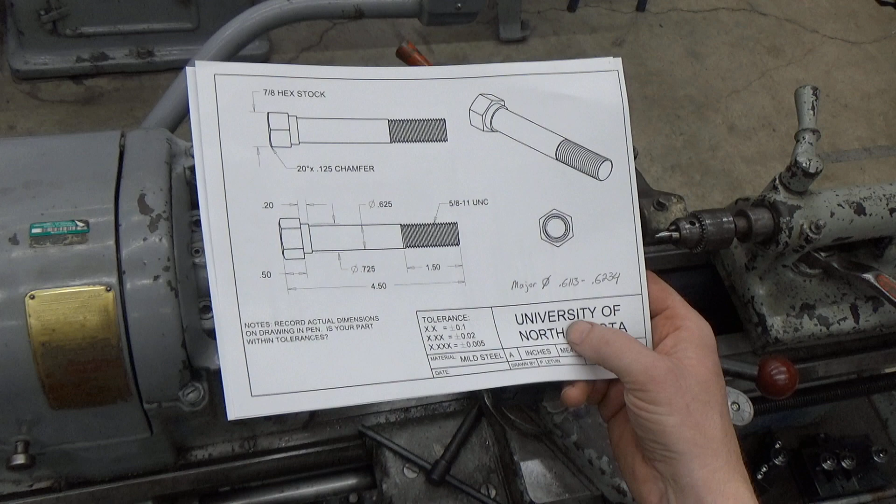All right, in this video we're going to be talking about the manufacture of this bolt that we use for our 418 lab. You guys can see we start off with a chunk of 7/8 inch hex stock.

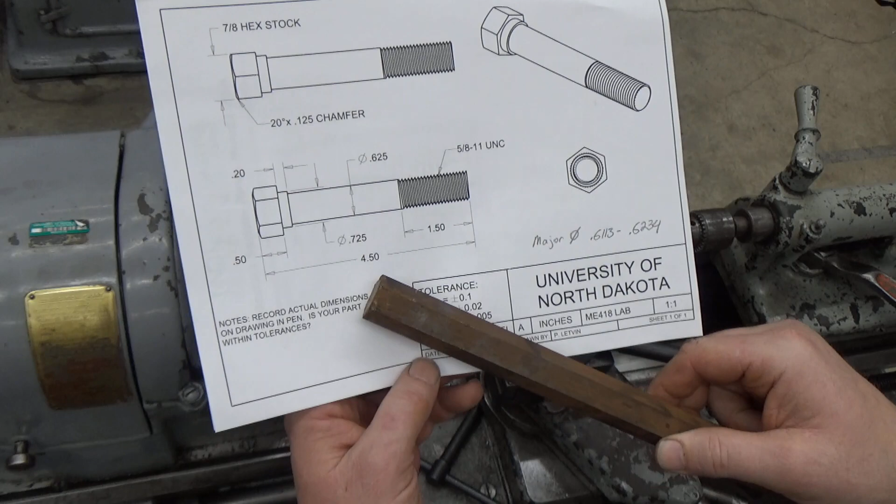Now it'd be a wrong decision to cut that directly to 4.5 inches, which is the finished length of the bolt, because we've got to have something to chuck it up and work with. So I recommend that we cut it at least 5.5 inches, if not much longer, so we can always bury some of the stock inside the chuck. So 24 inches would be fine, and 5.5 inches would be fine, so there's something to hang on to.

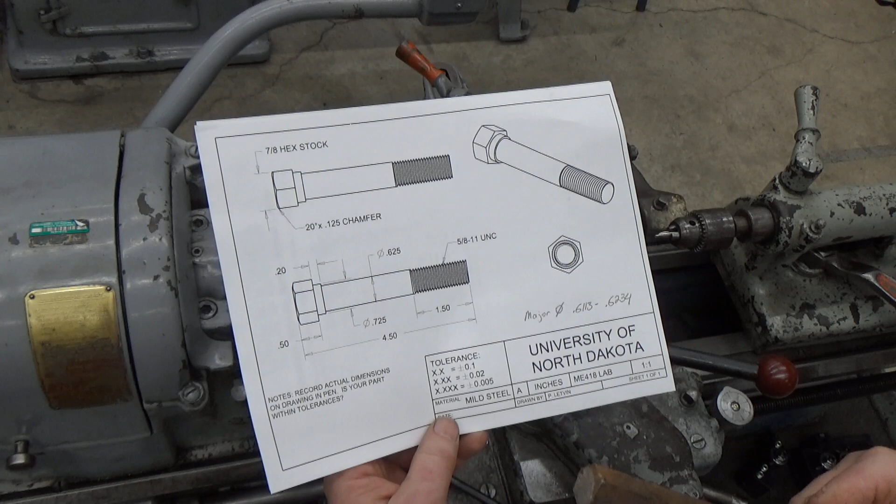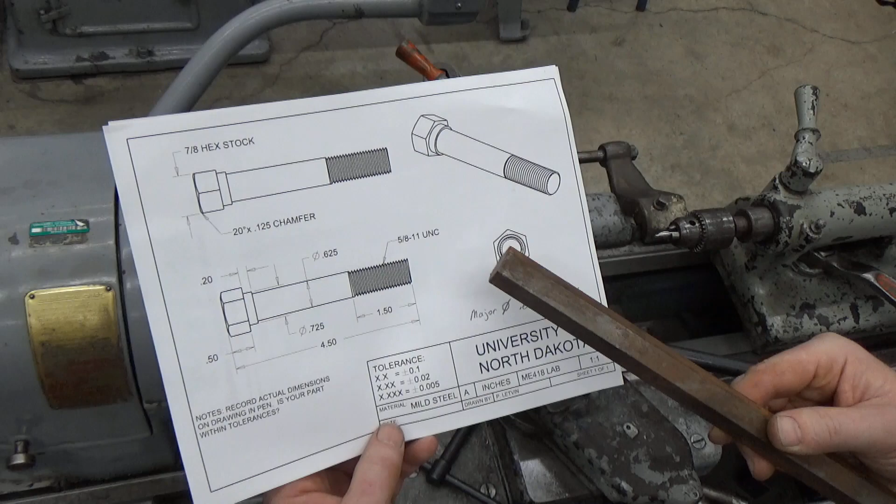And you can see the different operations. I'm going to take and work on getting it down to a 725 diameter first, and then afterwards we'll work on getting it to that 5/8 inch for the thread size there. So the only thing that's missing on here is we do need, because this is going to be sticking out of the chuck a good distance, we do need to put a center drill and turn it between centers.

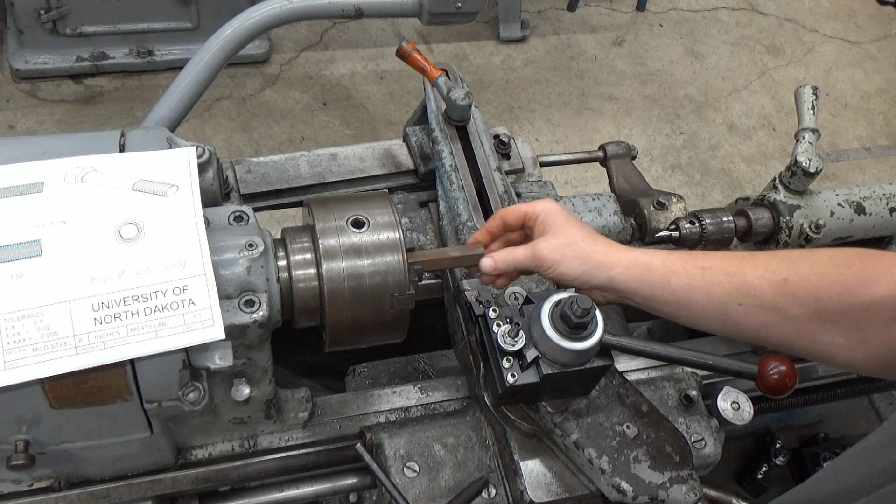So let's get it started here, and the first thing we're going to do is chuck up our material inside of our chuck. I'm going to hold it in there real close to the center so I get a nice face cutting operation done on this.

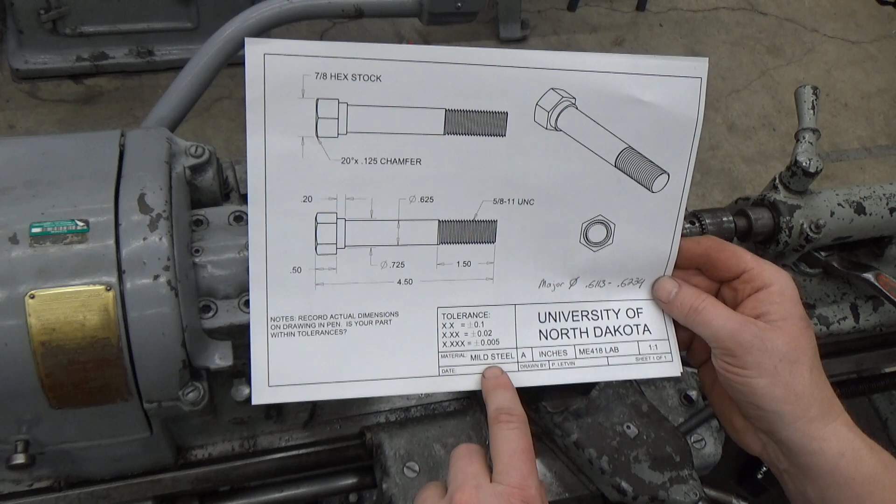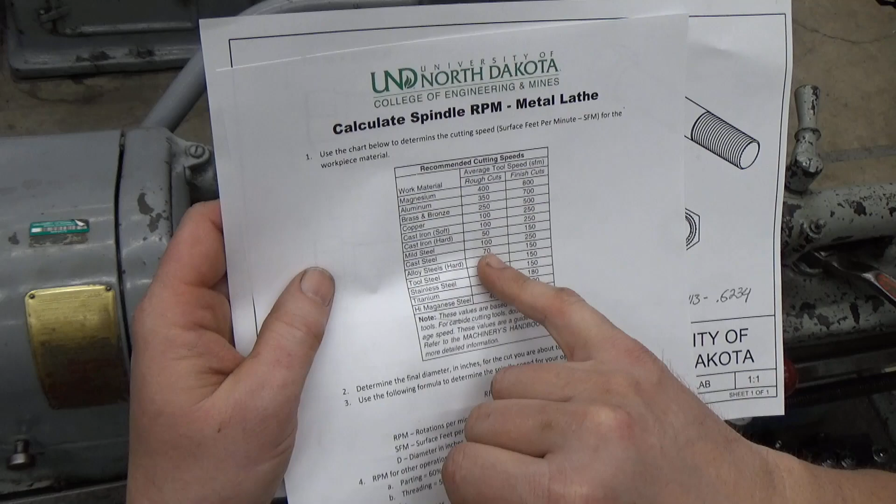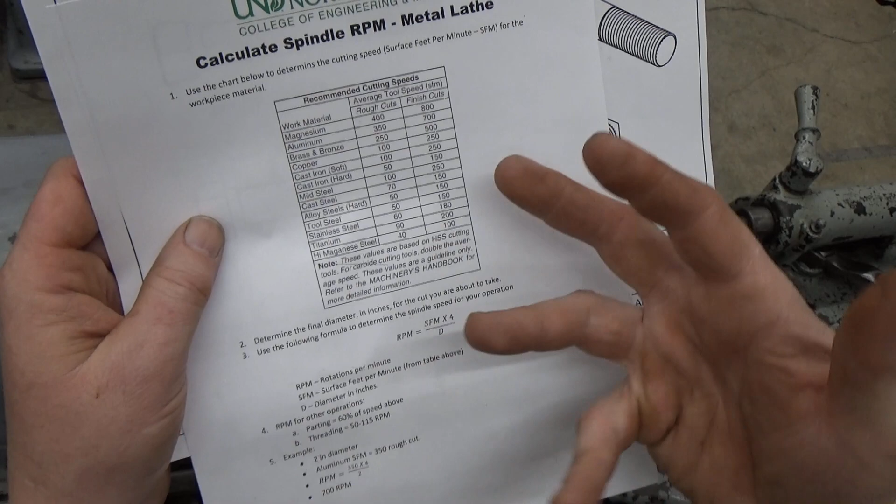The material we're making this out of is mild steel per the print, and if I look at this RPM calculator here, mild steel rough cut should be done at 100 surface feet per minute. Putting that into the formula, surface feet per minute times 100 times 4 should be 400 divided by diameter. Our diameter is 7/8, which if we shrink that down a little bit, it's pretty darn close to 1. So the formula works out, we want to run this about 400 RPM to get it started.

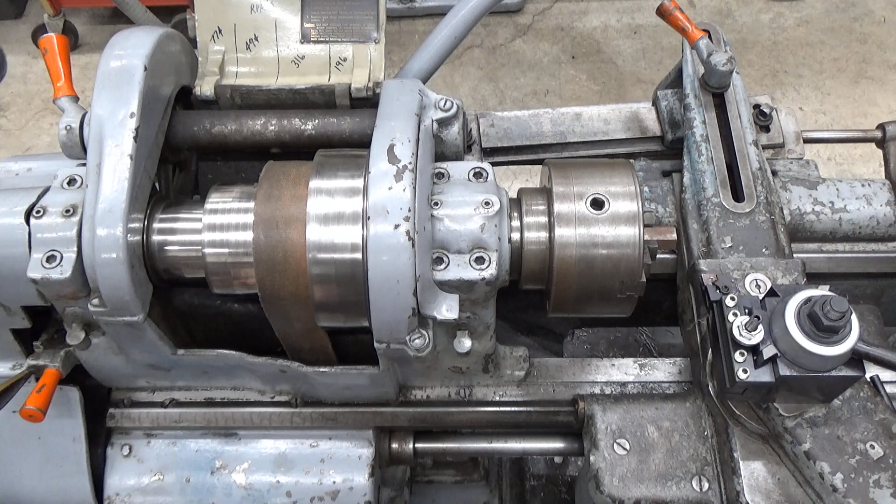So we'll double check that our lathe is set up here. I've got a 494 and 316 on our setup over there. So I'm going to go ahead and adjust our RPM so we're getting it at the 400 RPMs. We'll loosen up the belt, slide it over, see if we can get it to catch on that pulley underneath. That's always the fun part. Tension it. That seems good. And we'll check out, yeah, that seems to be running just perfectly.

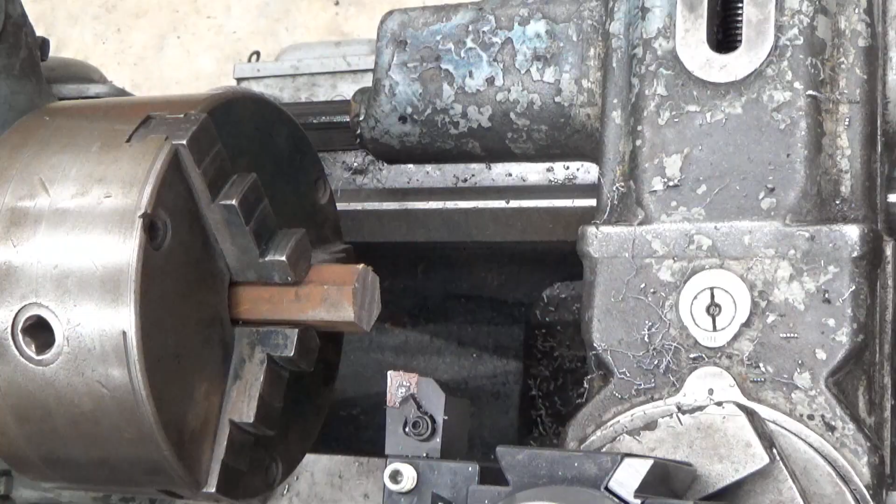Okay, so again, the first operation I'm going to do is just to take and do a facing on the end of the bolt and then do a center drill. So there's our stock. You can see it's just rough cut from the bandsaw, and we'll fire this up. I'll just manually face this off.

Okay, facing operation is finished. And now we're going to come in with the center drill, and I've already got a number 4 center drill that's locked and loaded here. We'll just tighten up the tailstock so we can get that done. There we go. I just need to get it in far enough so that the chamfer, that 60-degree countersink, can line up with our tailstock, our live center that we're going to use. So a little dab of cutting fluid, always a good idea, and we'll go ahead and drill this.

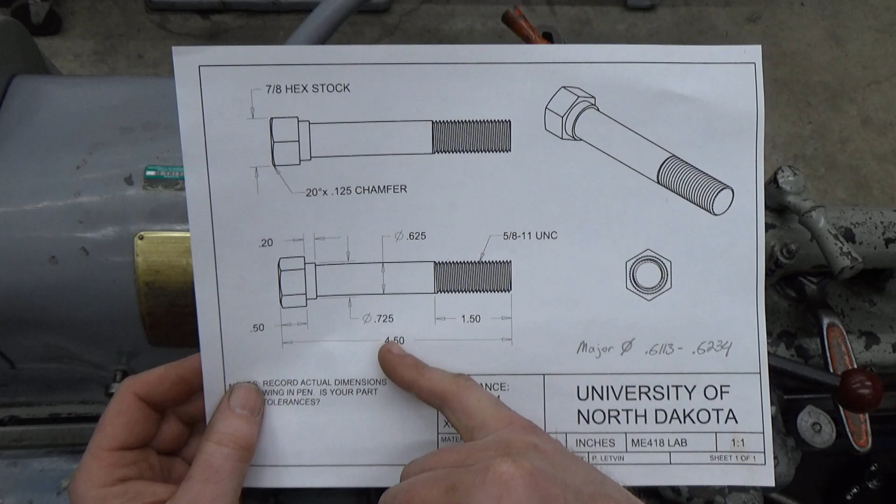According to the bolt drawing, what I'm going to aim for next is to machine this down to 725 all the way to 4 inches. So 4.5 minus the 0.5. I'm going to go 4 inches from this end over and line up so I get that turned down to 725. That'll be my next operation. RPMs should still be in good shape.

I've run into a little bit of a snag with my setup where I can't physically move this over further. So to fix that, I'm going to advance my quill out a little bit further and loosen up the tailstock. So back this off, make sure I can get it started, and we'll push the quill out here. There we go, I'll lock her down.

And again, put a little bit of feed on that, a little bit of pressure on it.

All right, seeing a little bit of a problem here, but we'll see if we can't push through it. It looks like the tool, the cutter, is actually going to be hitting on this piece. Let me get a better view of that. So we may have to do some entertaining things here.

Let's see what happens. But my general thing is to bring this down to 4 inches. So a good idea for me would be to mark that at 4 inches somehow.

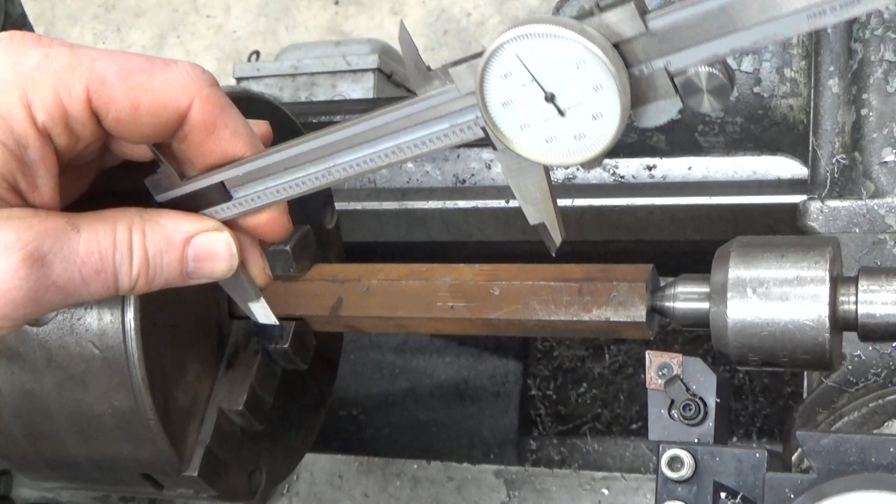Get a caliper here. And if I get this moved out to 4 inches, there we go, lock that in. And see if I can't position this in such a way to get that 4-inch mark on there. There's 4 inches from my end of the stock.

And that looks pretty good right there. I'm exactly at 4 inches, and my cutter is that distance away from the edge. So I think I'm going to create a little witness mark here for me, and I can get a little bit closer later. So maybe I'll back it off just a little bit to start it.

Okay, so now I've got a line at 4 inches that I can reference. So let's get into the cutting operation here. We're just going to turn this down.

Probably go in about 50 thousandths at a shot here. And then I'm going to be engaging the slide.

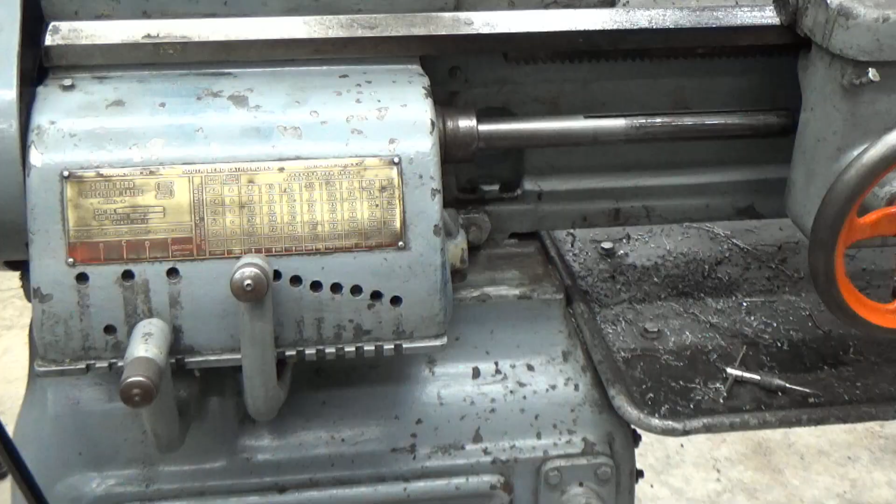I just wanted to get in here and show you guys the gearbox for my auto feed. I've decided to go with a fairly aggressive rough cut here, about 3 thousandths per revolution. I've got it set up in this column here, and then it's on the letter D, so it's going to be 3 thousandths per revolution that it's cutting.

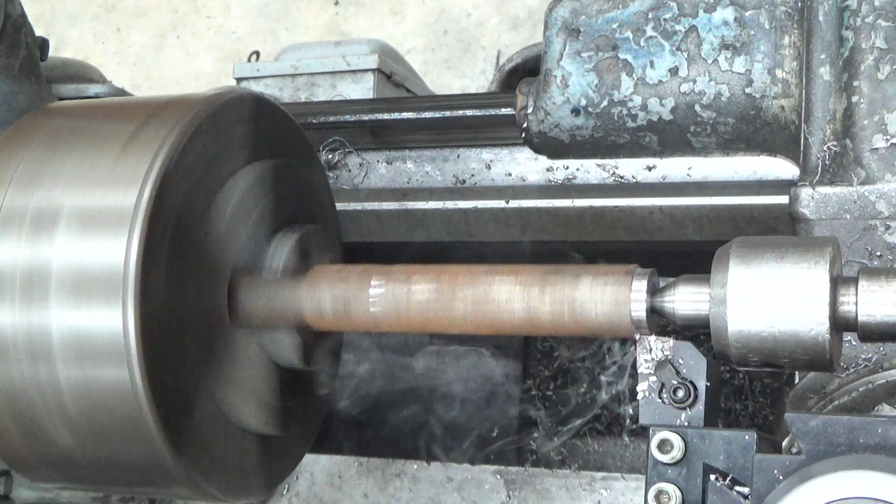We'll see how that looks once I get going with the cut. Here we go, probably going to go in about 50 thousandths, and then we'll engage. Seem to be getting a nice cut here. Again, cutting fluid never hurts. Whew, look at her smoke.

And I could see my witness marks at 4 inches. So I'm going to take this first cut, go all the way till it's close to that 4-inch mark, and I'll probably stay proud of that.

All right, now I'm just a fraction of an inch away from that line. I'm going to disengage and then manually feed it over. Again, I'm going to stay away from that 4-inch mark, but that should be good.

Now, without adjusting the top slide, I'm just going to run it back and engage some more here. Probably, again, about another 50 thousandths inward, and start making a cut.

So I finished my second pass, and now this is truly round, and I'm going to go ahead and grab a caliper and check. According to my drawing, I'm shooting for 725 diameter, and you can always take material off, but you can't add it back in. Right now, this is measuring at 735.

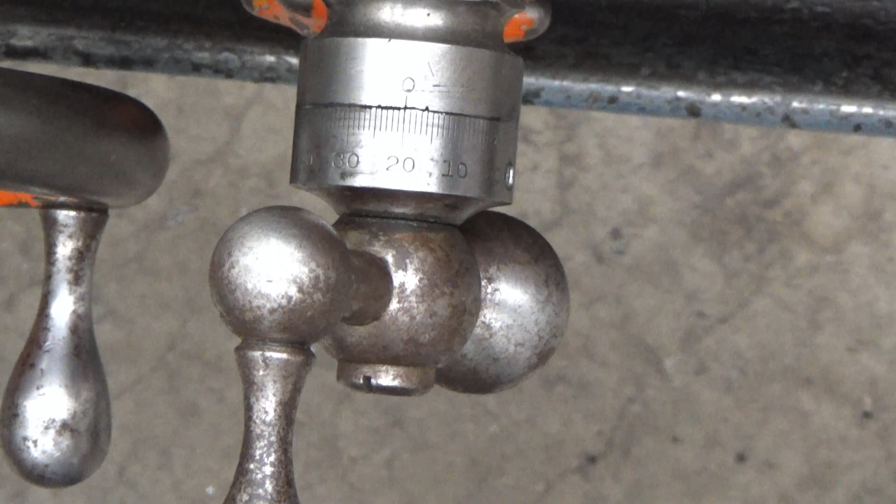It's about getting close to the end of that second pass. I'm just about ready to disengage the auto feed. Disengage. Brush it up. Looks good.

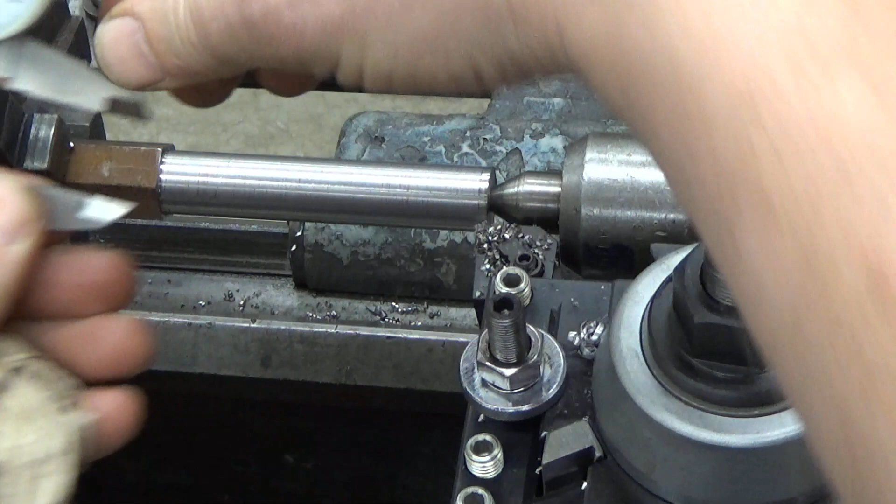So at the end of this pass, we ended up at 780, and I want to get to 725 as my end goal. So that's going to be 55 thousandths that I want to remove from this yet. And again, I want half of that, so I'm going to go about 25 thousandths on this top slide, and that would result in a 50 thousandths removal of material on the diameter.

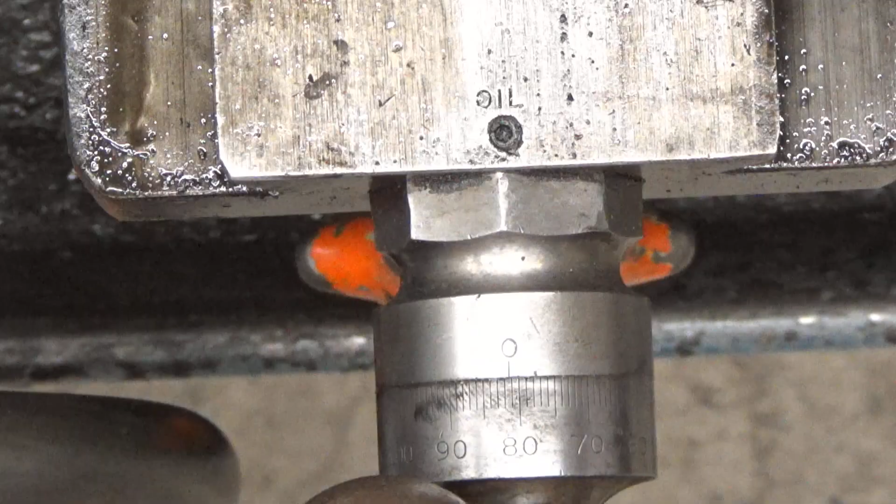So this is where my cross slide is sitting, and I said I wanted to go in about 25 thousandths on this. It looks like it's pretty close to about 81 right now. So I'll go ahead and fire up the machine and bring this in. There's about 5, 10, 15, 20, there's about 25 thousandths. We'll go ahead and make that pass.

Okay, so I finished that pass. We thought we might be getting close to our 725 mark. And if I look at this, I'm getting 730. So I'm only about 5 thousandths away from that target.

So if anything, I want to move that top slide in only about 2.5 thousandths to get my 5 thousandths target. So when I reach the end of the cut, I don't want to adjust where I'm at. I like this top slide right where it is. So if I just move this backwards...

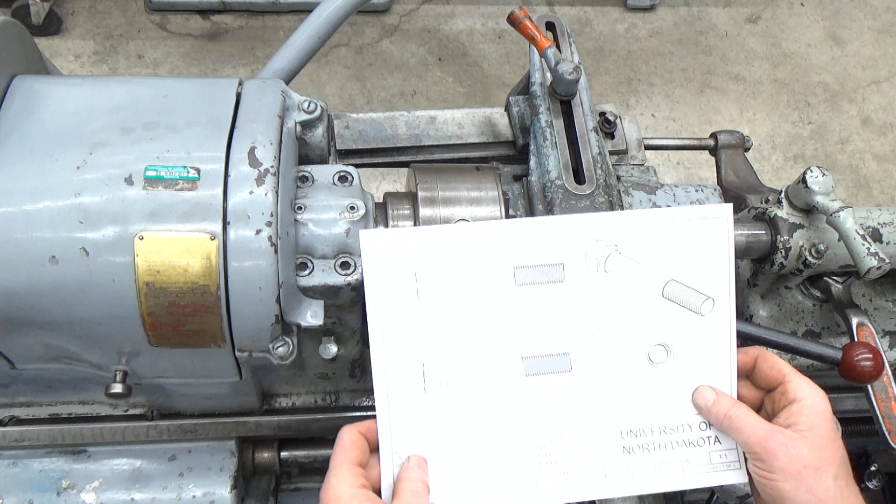Whoa, okay, so looking at this, it was a half inch for the head of the bolt, 4.5 inch length, so the difference between this point and this point was 4 inches. We kind of eyeballed that with a marker, but now let's go in and get that right where we want it. So how I'm going to do that is actually to slide my tail stock out of the way.

And get in there with a caliper and see where this is at to get an accurate reading on that length. So how did we do from here to here? Am I at 4 inches? All right, so it looks like we're proud of that line by design. And so we're at about 50 thousandths away from our 4 inch mark.

So I'm just going to go ahead and drive that in and fix it. And I'm going to remember my numbers here. So down here on the cross slide, when I hit my diameter, this was at almost 110. Okay, so it's at 108 thousandths right here, and that's my stop gauge. So I can keep going in and stop once I reach that 108.

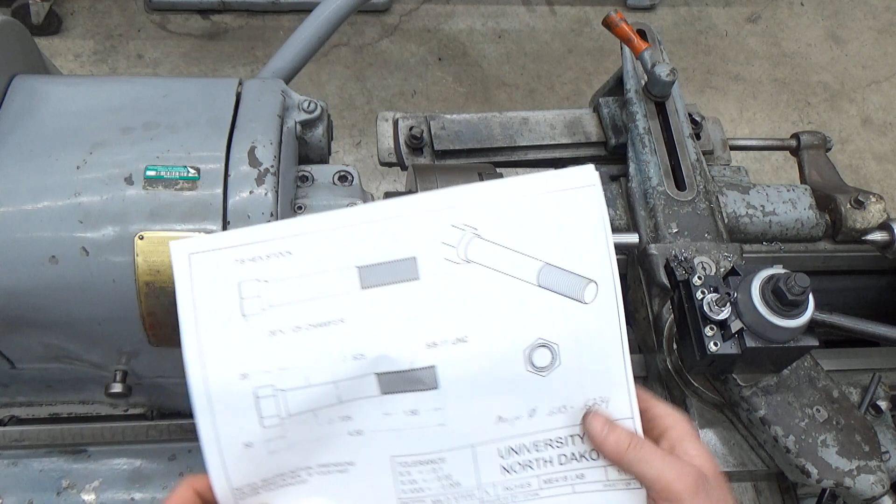All right, looks good. Yes. So we've achieved the 4 inch dimension from underneath the head of the bolt to the tip. Now our objective is to get this 625, and this mark here, so it's 625 diameter that's going to be shaving down.

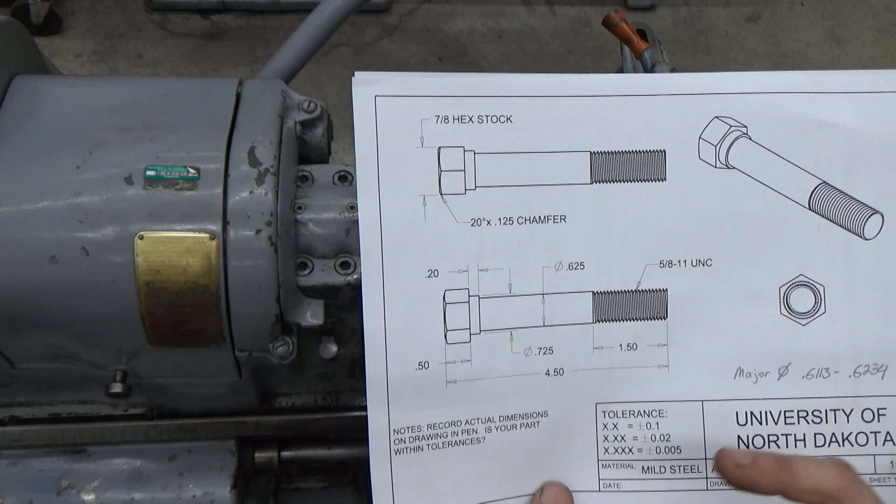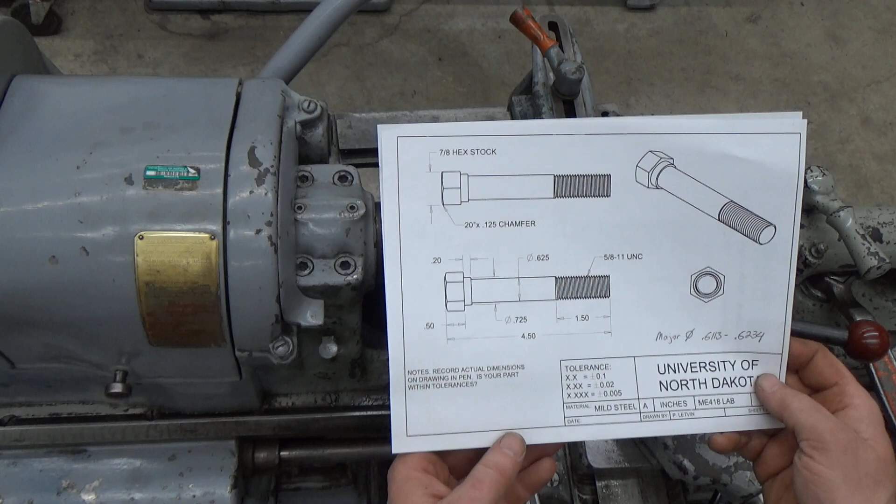And again, the difference here, 725 to 625, is a 50 thousandths difference. So I'm going to remember my cross slide was at 108. And if I engage that 50 thousandths in from there, that should be really close to the 625 mark we're shooting for. Okay, so I'm trying to hit this shoulder over here at 20 thousandths or 200 thousandths, and that should be all that 725 is. It's at 200 thousandths, and then it steps down to 625.

So in order to achieve that distance, I'm going to get a caliper in there and get it started away from that point. I needed 20 thousandths, or 200 thousandths, I'm sorry, between there. And so I'm going to actually get a caliper between that shoulder and the edge of the cutting tool and try to create a reference mark.

So now I have a visual that is a distance away, and I should be able to verify that that's about at the 0.2 that I was aiming for. And I think I'm a bit proud of that, which is good. It's about 10 thousandths proud of that line. So that'll be a good visual indicator of when to stop turning this down.

All right, so now back to turning the rest of it down. We're just going to keep going, same practice, just going slowly until we hit our 625 mark on here. Taking off about 25 thousandths on this pass. Again, the best philosophy is just to work your way up to that number, because it's easy to remove material. It's a lot harder to put it back. Probably the 4th time I said that by now.

Doing a check on that last pass, and it's measuring at about 670, which is about 45 thousandths from where I need to be. So again, I'm just going to go in about 25 thousandths on the cross slide and work my way up to that number. So here we go, 20 thousandths, sorry. So 5, 10, 15, there's 20 thousandths, and we'll engage.

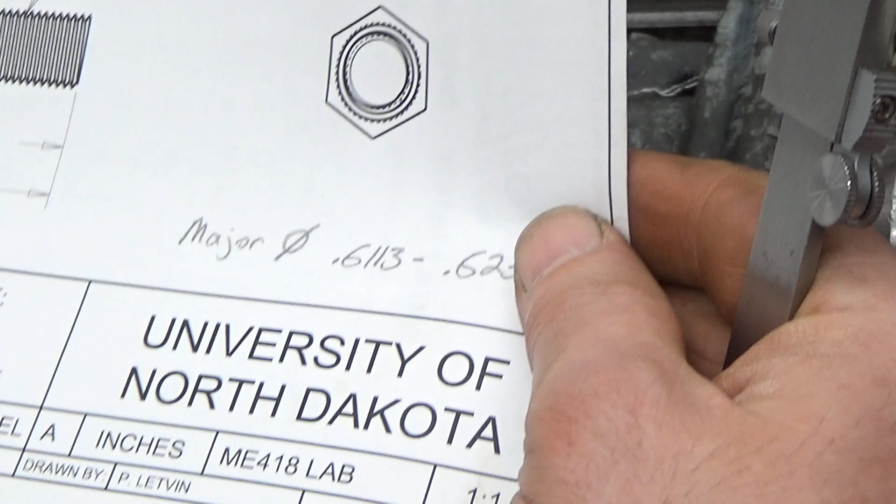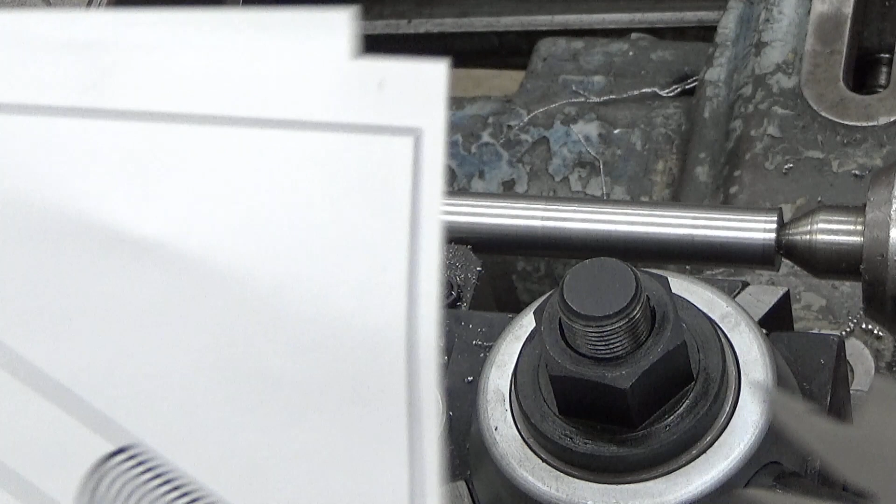And away we go. Okay, just finished off that last pass, aiming for 625. I got it down to 620, which is just perfect, because when you look up in the machinist handbook for major diameter of external threads, we should be in between these numbers, 6234 down to 6113. So I'm right within the range for the major diameter for a 5/8 11 UNC thread. Very happy with that. And our next operation, next video, we're going to be talking about getting the thread cut.